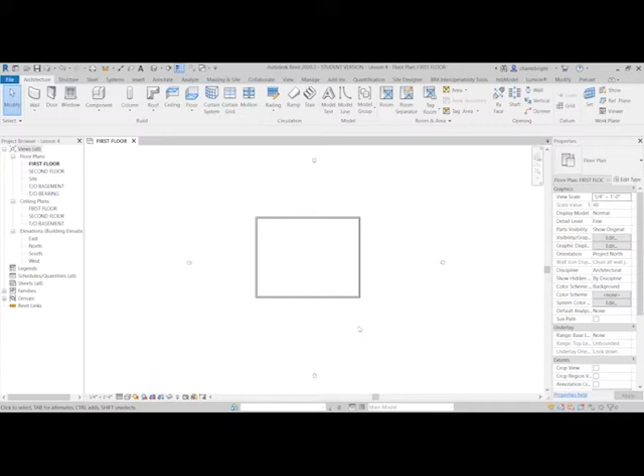If you zoom in, you'll see, based off of the wall that we put in, you now can see what the wall is made out of. You see hatch patterns and different things like that. When we had it set to coarse, and I'm just going to switch it back really quick, you don't see that. So I'm going to put it on fine, and it is now correct. Now, that's another setting for another class, but you'll notice it's showing properly.

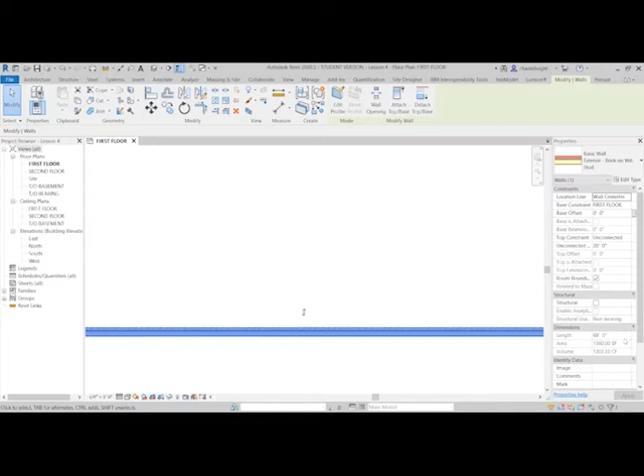However, if we had drawn the other way, we went clockwise, if we had gone counterclockwise, the brick would have been on the inside. If you happen to do that, it's not a big deal. You could still fix it. All you need to do is click on one of your walls. It's inside out, okay? There's a little directional arrow that pops up in the middle. All you have to do is click it and flip it. Now, obviously, I clicked it and I flipped it and I put the brick on the inside. I did it wrong. That's okay. Just click and it flips back. Very, very easy. You can also do a right click and say change wall orientation, and it does the same exact thing. So we've got all of our walls flipped and they're facing the right way.

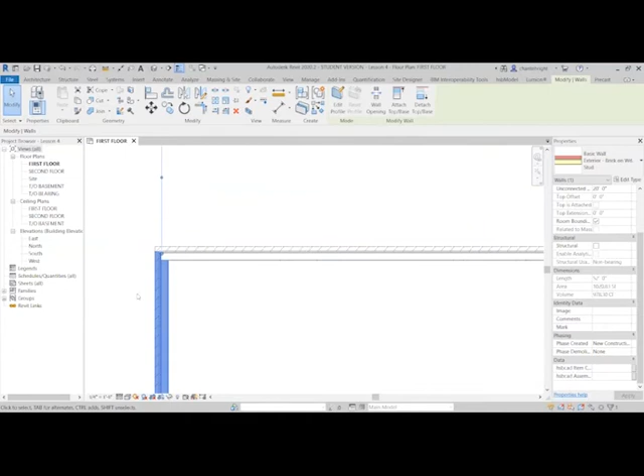Let's say though that you decided, I'm just going to click on one of these, and you said to yourself, well, actually, I wanted this to be from face to face. I wanted it to be 50 feet. As you can see right now, if I zoom in on those dimensions, they're actually showing to the wall center line, and that has to do with how we placed this wall in. We just put it in. We didn't change any location information. All you have to do is think about it this way. I want to change how far away this wall is from that wall.

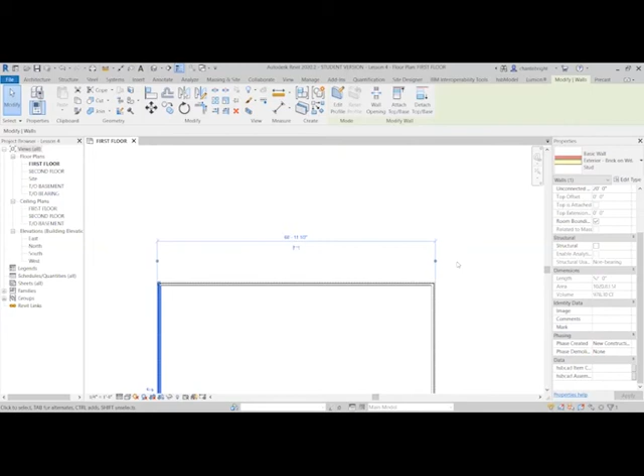So I'm going to click the grip, and I'm going to click it again so I can get to the face of the wall, and you'll notice that it went to the face of the wall. And then you're going to do it again on the other side. I'm going to click my grip, I'm going to go to the inside face, then it's going to go to the outside face. And I now have it going from face to face. I want it to be 50 feet. So now I'm going to click my dimension line, and I'm going to type in 50 feet, and there we go. It now has moved so that this wall here and this wall here are 50 foot long. So that's how you have to think in Revit. It actually has to do with adjacencies and how far away one item is from the other.

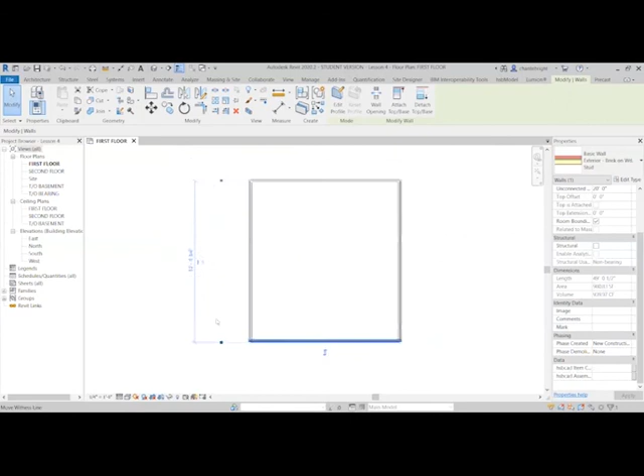And I'm going to do it the same way with this wall because I want it to be a 50-foot square. We're going to be nice and plain and simple here. I'm going to click face, click my witness line until it gets to the face. Do the same thing on this side, and then change this to 50 feet, and I now have a 50-foot square building. And you can join me next time where I can show you how to add in some maybe interior walls and do a little bit more with what we have here with this drawing.